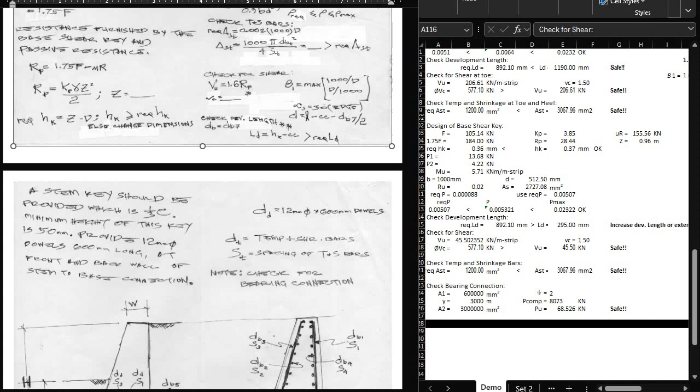So, the development length is equal to the double asterisk. Let's go back here. And then the actual development length is HK minus clear cover. So, 295. And the required LD would be this, the double asterisk.

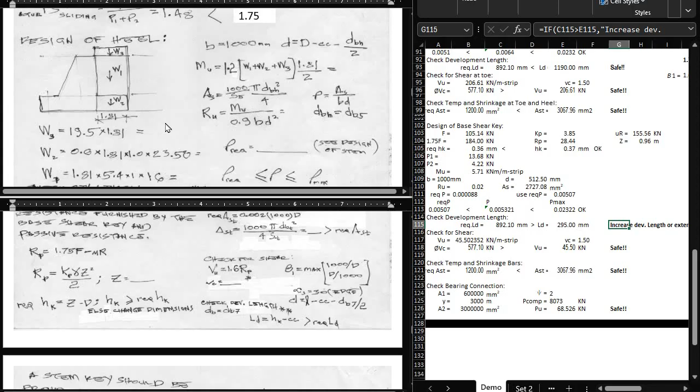Since it's the shear key, its depth is capital D. This is HK. So how do you develop that? Then you make an L here. Or initially, you hook there, like that. Or extend it, make an L, like that. Now, the length you'll add would be small letter L. So that's the actual development if you extend it.

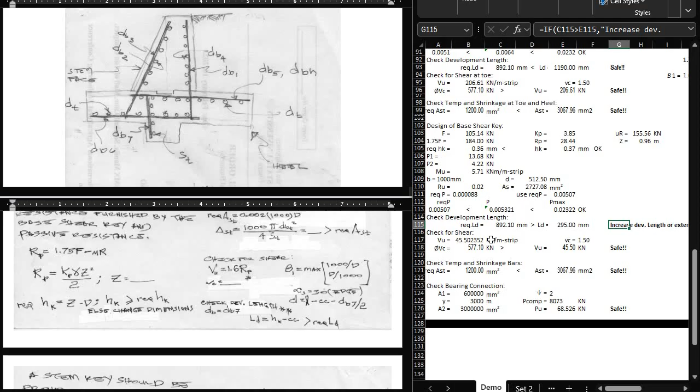And what's next is check for shear. The equation we'll use here would be this: 1.6 times E104, and that is R sub P.

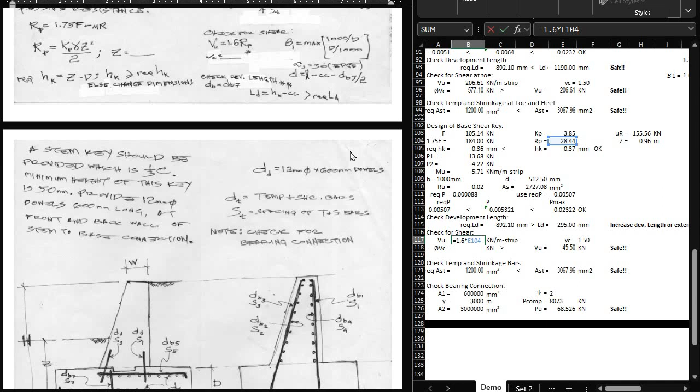And then our allowable stress VC would be the single asterisk. Okay, so there it is. This is VC, and that is equal to...

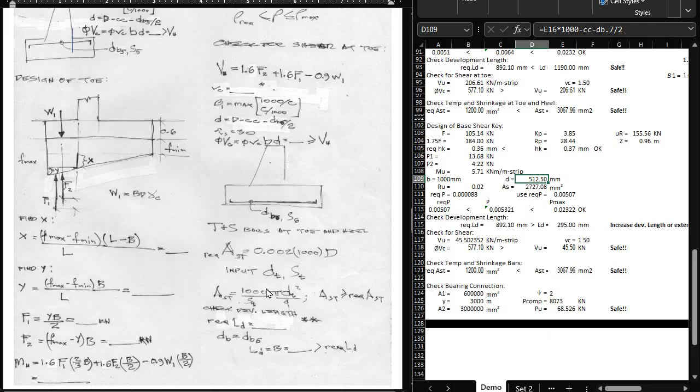The depth we're getting would be D minus CC minus DB7 all over 2. Okay, that's our effective depth since it's the development of DB7 that we're getting. So this is DB7.

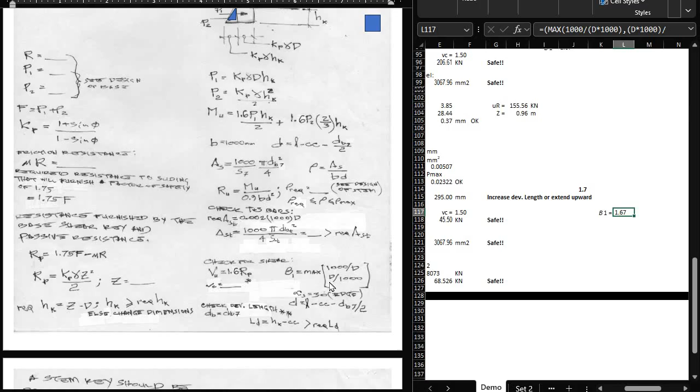And then what else do we need here? It's the beta 1. Beta 1 here is the maximum of 1,000 over D or D over 1,000. Which is this. Okay, so next is,

after getting the allowable shear stress VC, we'll now get the allowable shear force phi VC, which is equal to 0.75 times vc times B times D. So this is the equation for phi VC: 0.75 times allowable shear stress small vc, which is here, times B. Now that B, that is equal to 1,000, then our D.

But what is D? D is equal to small l minus clear cover minus dB7 all over 2. And then from there, you can now compute your allowable shear force and compare it with your actual shear VU. And then next is checking of temperature and shrinkage bars.

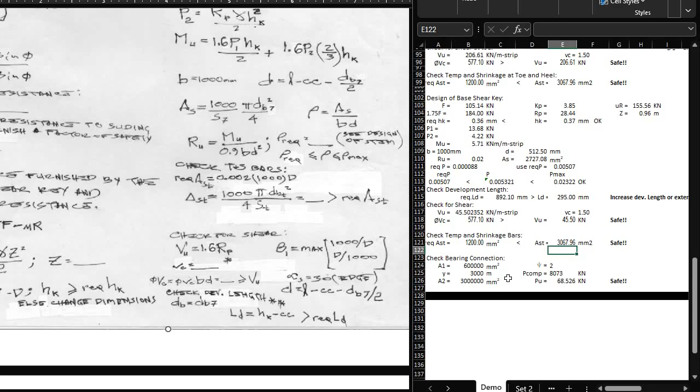And finally, check for bearing connection. For check for bearing connection, I didn't include this in the lecture. However, let me explain here. So A1, this is equal to C times meter strip.

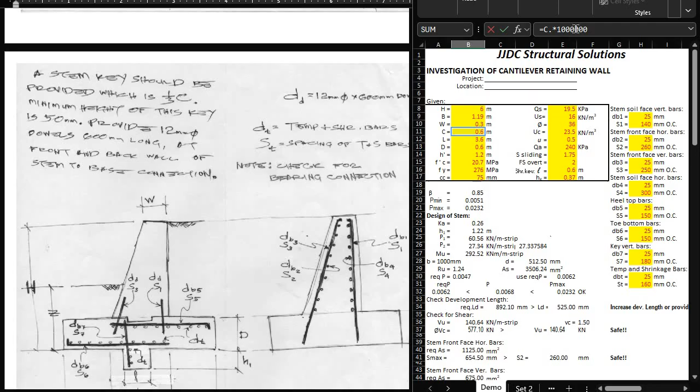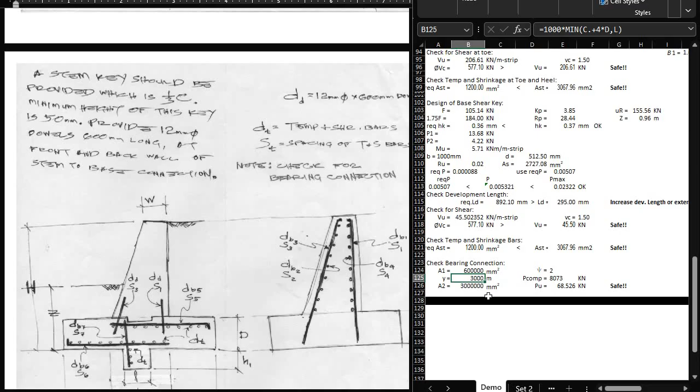Then area 2, that is equal to Y times 1,000 or meter strip. But what is Y? This is the check for bearing connection, so I just included it here.

So let's look at area 1. This is C times meter strip, and its unit is millimeter square. However, here, C times 1,000 times 1,000 because originally C is in meters, so we convert it to millimeter and then multiply it by meter strip, that's why millimeter square is its unit.

Next is Y. Y is equal to the figure that is symmetrical to the base of the column. In this case, this is the wall. So it's the minimum of C plus 4D, and then L, and its unit is millimeter again. So if we check this, that's Y, and take note it's multiplied by 1,000 because C, D, and L are in meter units.

And then next is A sub 2, that is equal to Y times meter strip. Or that is this. And then finally, psi is the minimum of square root of A1 over A2, and 2.

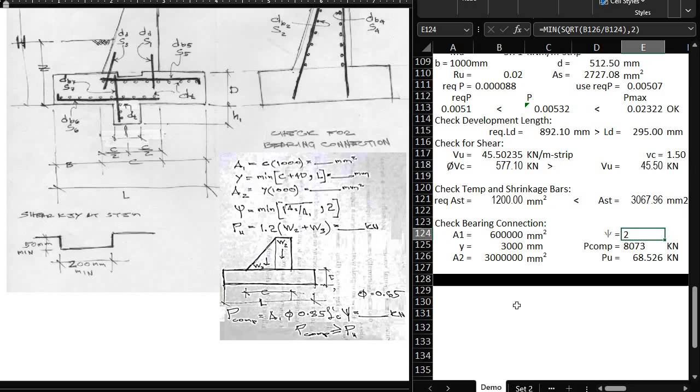And then next is P compression. Your P compression is A1 times phi times 0.85 F prime C times psi. Now the phi here is 0.65. This is the capacity reduction factor, and this is in terms of kilonewton.

Now, the weight we got here, PU, is 1.2 times W2 plus W3. That is, the actual load of the vertical member, which is actually this stem. For a column, that's the actual load if it's a column, W2 and W3. So going back, your P compression should be in kilonewton units, same for PU.

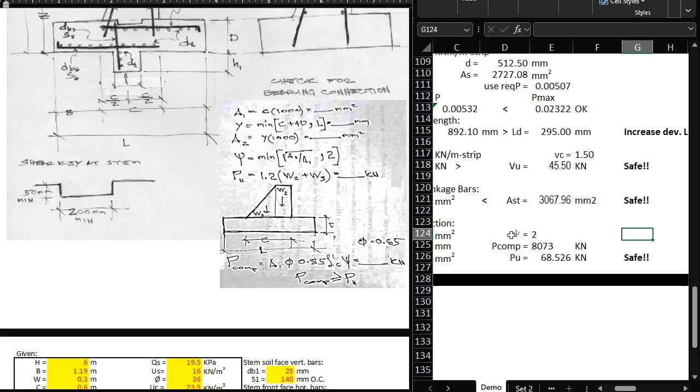And most of the time, in retaining walls, the P compression always governs, because there's no column load here. So the bearing connection of the stem and the footing is too large. Originally I didn't include this, but since I added it in the Excel, I included it in the pattern too.